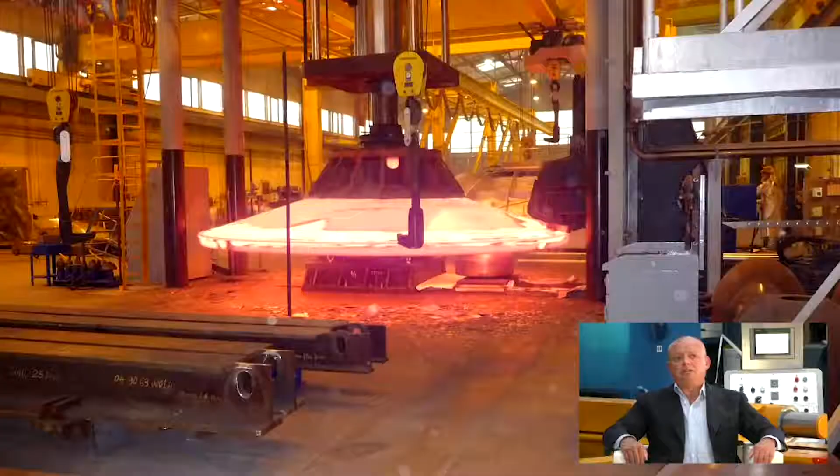I think that there is always room for innovation and sustainability. Faccin Group embodies this spirit by offering to the market 3 leading brands like Faccin, Boldrini, and Roundo. Our challenge today is to achieve the highest level of efficiency in any kind of machinery that we produce.

Well, I can definitely say that we are in very good hands. But before we move to the main subject of this webinar, Rino, I wanted to ask you something. We have seen a huge interest in this webinar and many registered people from all over the world. Why do you think this is?

Well, Javier, let me start by saying that most manufacturers of pressure vessels, truck tanks, silos, and other kinds of tanks and pressure vessels purchase the dish heads and then they weld the component to their rolled part. Let me tell you that the demand is huge and dish head manufacturers are getting overwhelmed. With the pandemic, the deliveries, particularly internationally, has been disrupted. And there is now a new line of thinking about manufacturing locally, and I do believe this is driving our interest to this webinar.

Perfect. So we will focus on this concept and more during our webinar and explain in detail what we are doing to achieve efficiency in our machines. In the meantime, let me show to our viewers our group's manufacturing capabilities. Certainly, Javier. Let's start from the real facts of our capabilities and our facilities.

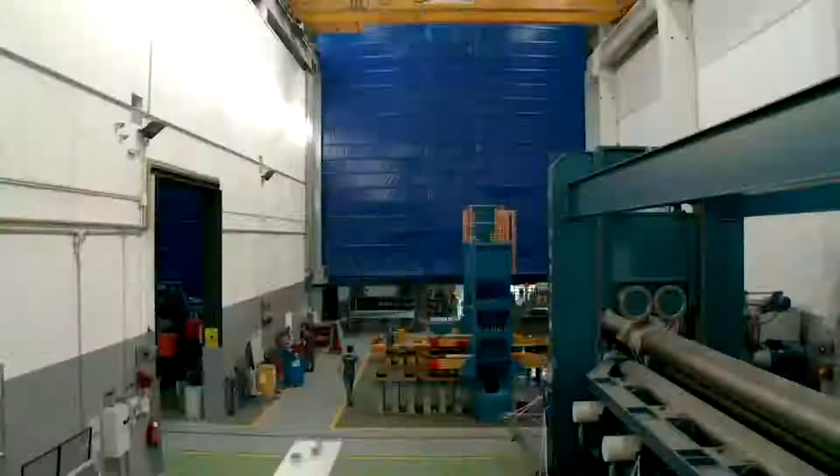Wow. During these days, we have been discussing all over the world about the impact of COVID-19 on the world economies and on the industrial production after the restrictions applied to contain the pandemic.

So, Rino, what do you think about the vertical production structure? Javier, this is a real big thing. During the last decades, many industries have organized their supplies by outsourcing from the market. It has been understood very clearly now, when the market collapsed and many companies could not follow their production schedules and supply chains were not performing, that outsourcing can be risky in such a market condition.

As you have seen in the company video, at Faccin we have a vertical integration. We start with plate profiling, fabricating, machining, and we can do internally turning, milling, boring, and polishing.

We found out that having this in-house has been the greatest support for our resilience. Furthermore, we have full control of quality inspection, pre-shipment commissioning, testing, and crating for shipment. It was a wise decision to keep vital and critical production stages inside Faccin. This allowed us to keep working and acquire new orders, as we have better control on delivery and scheduling.

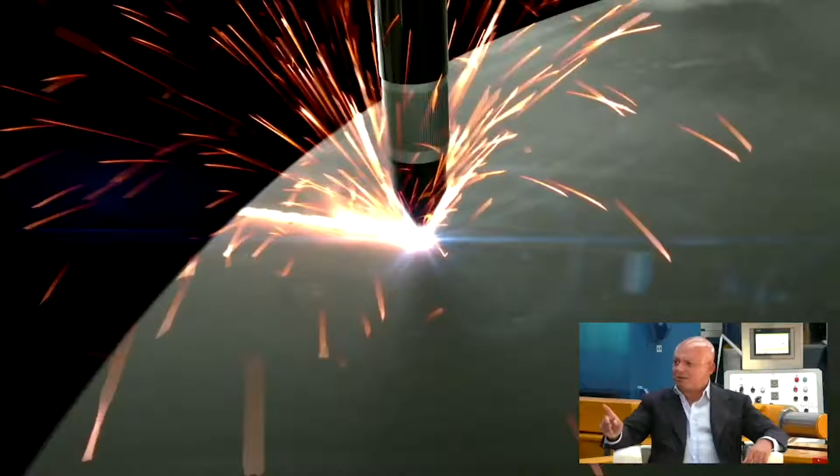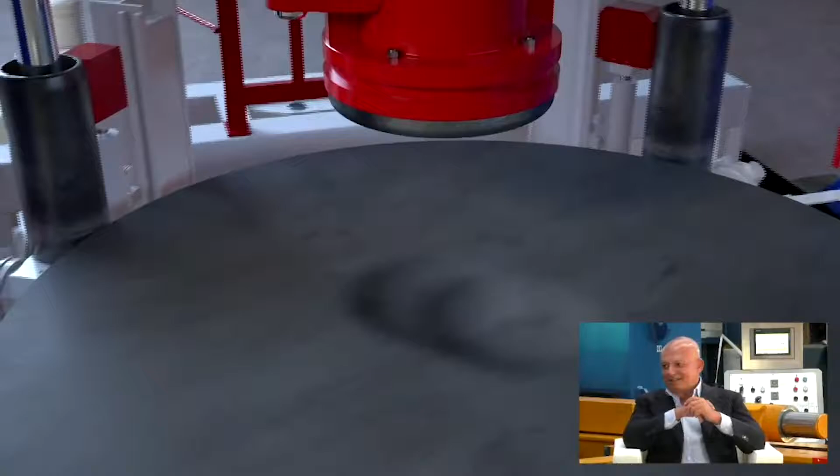Rino, we are now ready for the first main question. If I were a client, what should I know before investing in a new dish head line? At first, Javier, there is not a common rule. What is best for one client is not the best for all clients.

Rino, I think we both agree on your assessment. Tell us how to get the best solution for a specific customer. As a first step, it is very important to make the preliminary approach to the customer's needs. The pre-feasibility is the most important stage for the proper definition of the correct machine.

Let's ask Andrea Comparin, Senior Sales Manager of Faccin Commercial Department. Hi Andrea, can you introduce yourself and explain what is generally the client's preliminary approach? Hi, this is Andrea Comparin. I've been working at Faccin since 2011, and I've had the opportunity of traveling throughout the world for the company, but I follow mostly Northern Europe and some Mediterranean countries. I also joined the sales team for relevant projects all over the world, from Australia to South Africa, Middle East and Far East.

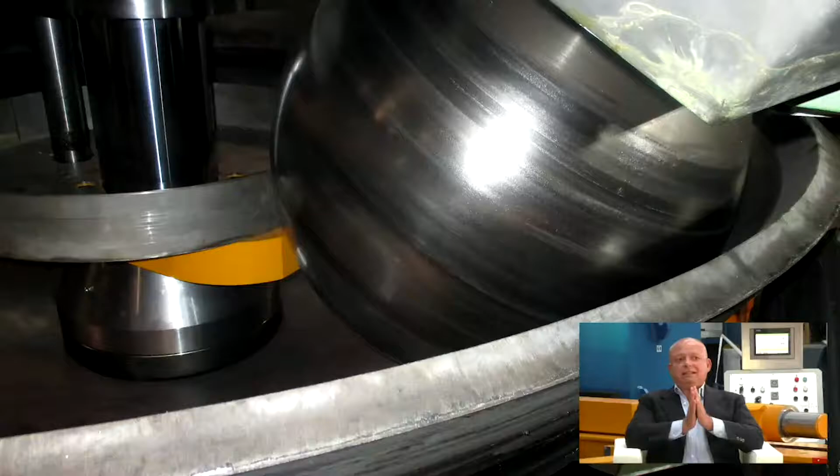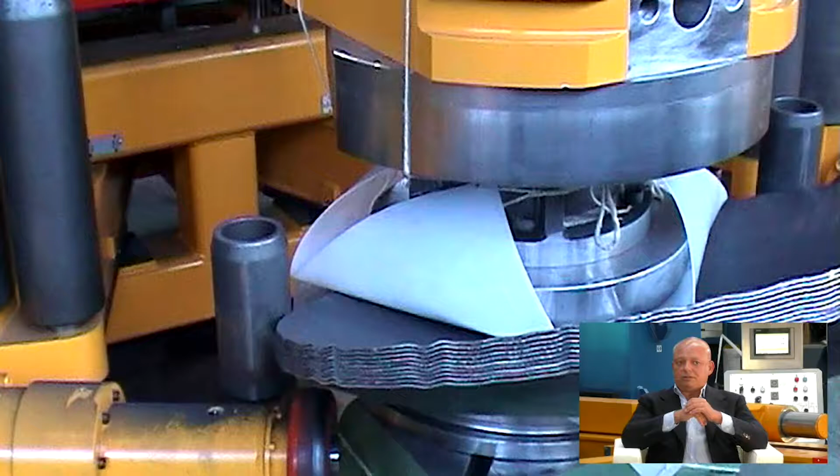Javier, you're asking something very important. Many times we see proposals from our clients, and at first sight they just look like a list of brands and components used to manufacture the machine. We are a machine manufacturer, and we care about components, but our target is not reselling pumps, bearings, valves, or electric motors. What we have to sell is the performance, and we have to guarantee the performance of our machinery. Our machine has to be a profit-making unit for our clients. Again, a profit-making unit.

Rino, let's make it simple for our viewers. How do we get to a sustainable investment for our customer?

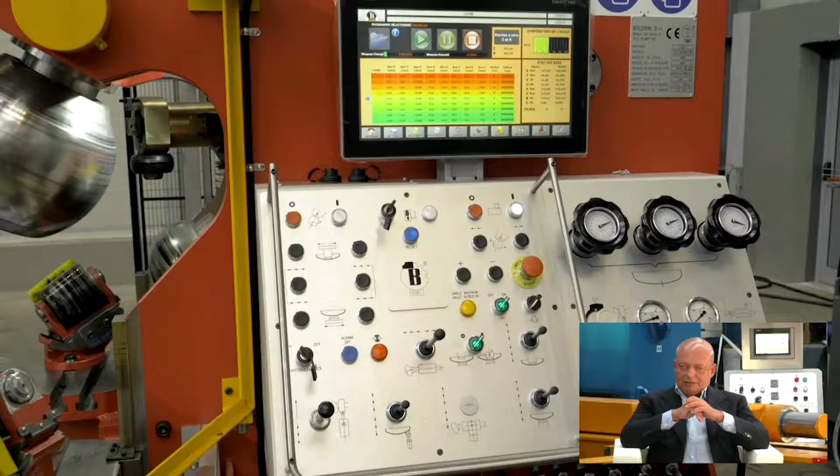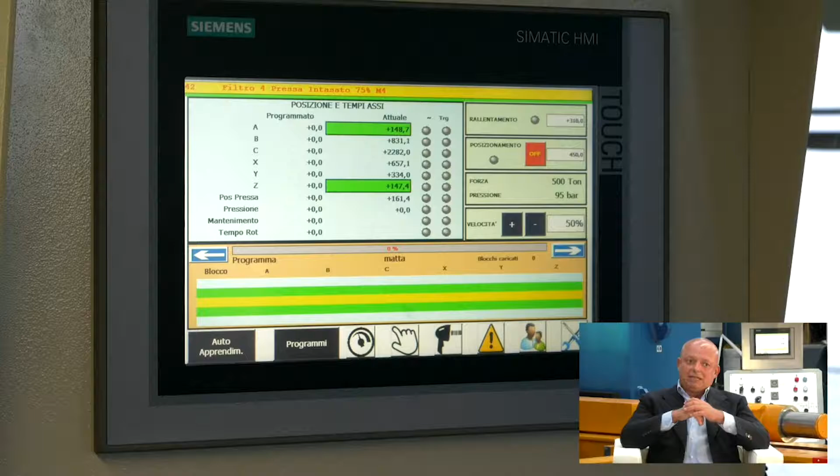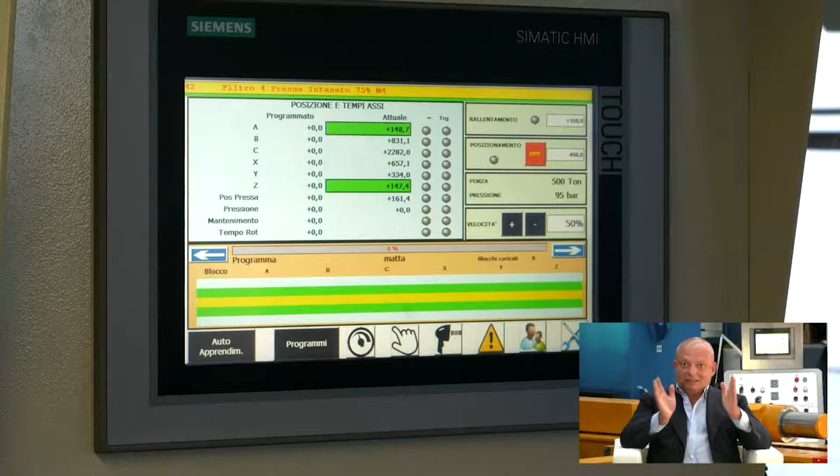We start from the performances of the machine and the production output. We are investing in new software to increase the data output of the machine so that our clients will have the machine linked to their network, with the possibility of checking from the back office how many hours the machine was active, how many hours it was running in production, and the total daily production. In some cases, it will be possible to upload production cycles directly from the office to the machine, and also our target is to check the final production cost of dishing and flanging, including the energy cost applied for each stage.

And also, we have to be predictive for the maintenance of the machine. It will be a modern and updated way to comply and to have a better footprint in the production plant of our clients, and to reduce carbon emissions and protect the environment.

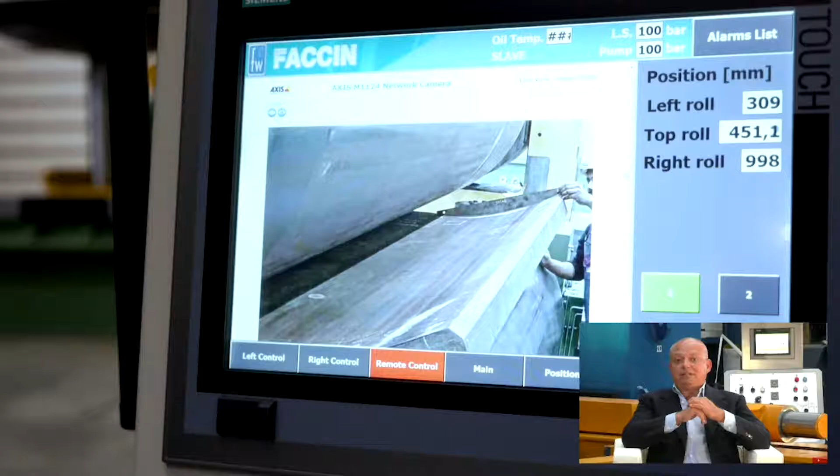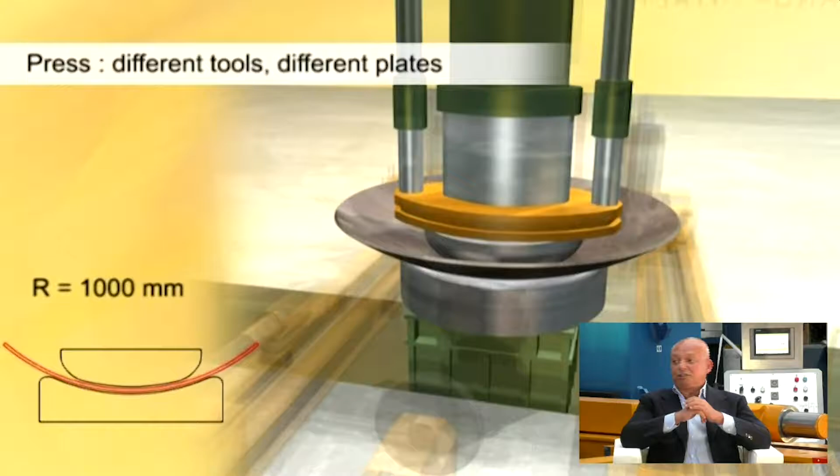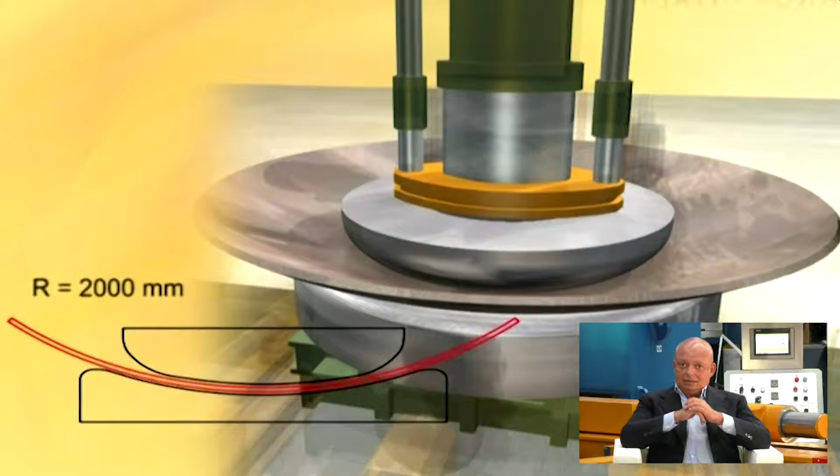It sounds very interesting, Rino. Could you explain what else we could offer to our customers? Javier, we are very flexible to adapt to our clients' needs, and for many decades we have manufactured many different types of press dies for specific needs. The right press tooling might reduce the production time up to 30-40% in the total dishing time, and it can also reduce the thinning.

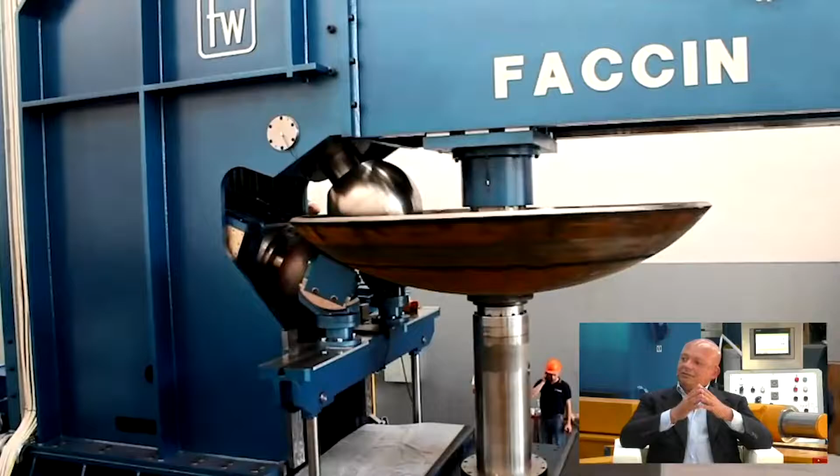A typical example is when we press aluminum plate. Some diameters and radii require changing 3 to 4 dies, and the time to change the dies is much less than the total time if we were not doing this process. So at the end, we save time.

Using the right tools, we also reduce significantly the thinning. Why that? Because we don't overwork the material. Saving the material is the first target for a client. And also we may save intermediate heating processes, because if you can control the thinning, we don't need to add extra expensive heat treatment. I think Marco Massensini could tell us more about his experience.

So Marco, can you tell us about yourself and your experience in the support process to your clients? Hi Javier, I'm very dedicated to the support of our clients, and I recently had a few cases that we studied and carried out successfully. I joined the Faccin family 4 years ago, and I come with a process engineering degree. I've had a great chance to grow my capabilities following very interesting tasks.

One client with a market activity of 25 years producing equipment for the pharmaceutical industry and food and beverage had developed its own equipment. I analyzed their production steps with them, and finally we came out with new machinery and new processes. The final result was a significant production cost reduction, and our client was very satisfied since they obtained a higher added value product to offer in the market at a better price.

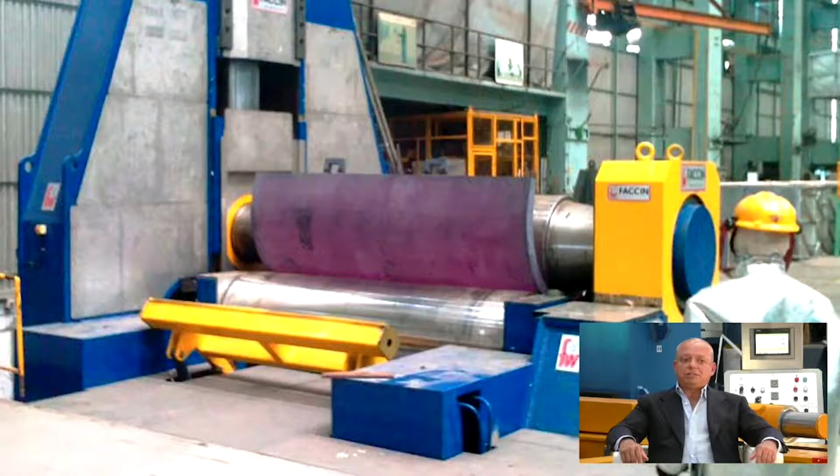We have materials that can be formed in both cold and hot condition, and we choose hot forming many times to increase the forming capability for higher thicknesses. In pressing, we may also choose the hot process to reduce thinning and cut manufacturing time. We have very successful experience with the dishing press and manipulator to press plates up to 160 millimeters in hot condition. In other cases, heat is necessary to avoid damage to the material, for example aluminum, where we have to heat the plate up to 250-270 degrees to avoid cracks. With titanium, if you don't heat it up to 500 C, there's no chance to form it without dramatically damaging the material.

Hi, this is Diego Morbini. I've been working at Faccin since 2005, and I've visited many countries during my time at the company. But I now follow mostly the Chinese market, Far East, and Oceanian countries. I also support the sales team in relevant projects, from technical evaluation of special equipment to tailor-made solutions for different fields of application. It's very important to start with a proper definition of our clients' needs, as this is key to the right proposal. I've got experience selling forming lines to customers that manufacture pressure vessels and cryogenic tanks. In Vietnam, for example, we were successful twice with a client that produces heads for the global market.

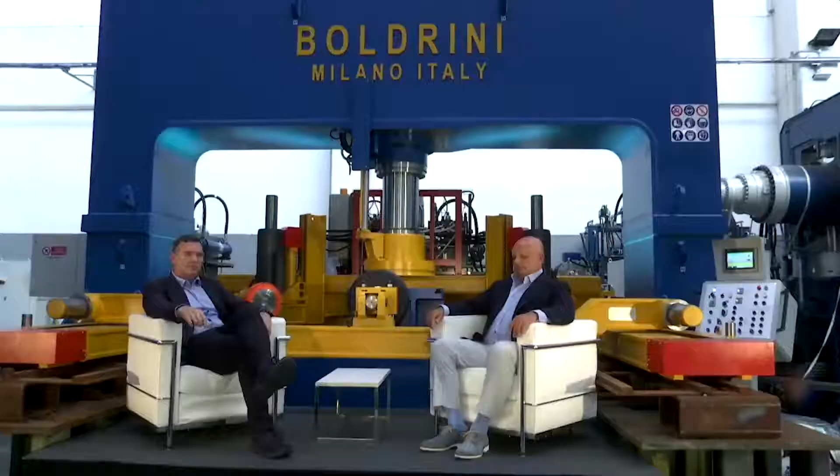So Diego, in your opinion, what is the key factor of your marketing strategy? I think our clients consider the support we offer, from the proposal to after sales. We build confidence based on the group's long experience in design and manufacture of head forming lines, and all the expertise we can provide by adding other machinery to the production line.

So in other words, Diego, you're saying that integration of a variety of machinery for different production processes is a very positive matter. Yes, of course. We are prepared to transfer the necessary technical information to support the client's final decision. If required, we may also offer a complete manufacturing line for tank or pressure vessel production, including support for defining the complete production cycle.

Rino, there are so many different models of presses, manipulators, and flanging machines. Why? Some machines look very similar, but the production process we can achieve has significantly different results. The easiest way to understand is to check the geometrical capacity of a machine. But then we can see that specific configurations could save time, and time is money.

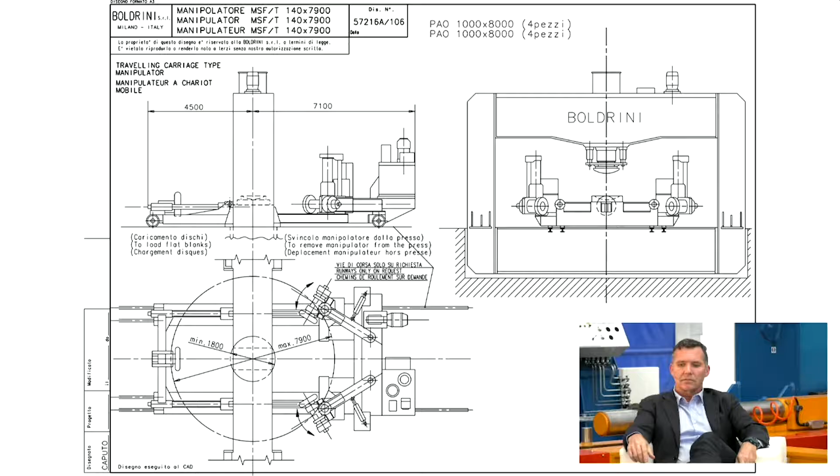Rino, I would like to show some pictures. Would you like to comment? Surely, please. Well, you can see in this picture a layout drawing of a typical dishing press with manipulator. And this is specifically a machine with a pretty big daylight of 8 meters and 1,000-ton force.

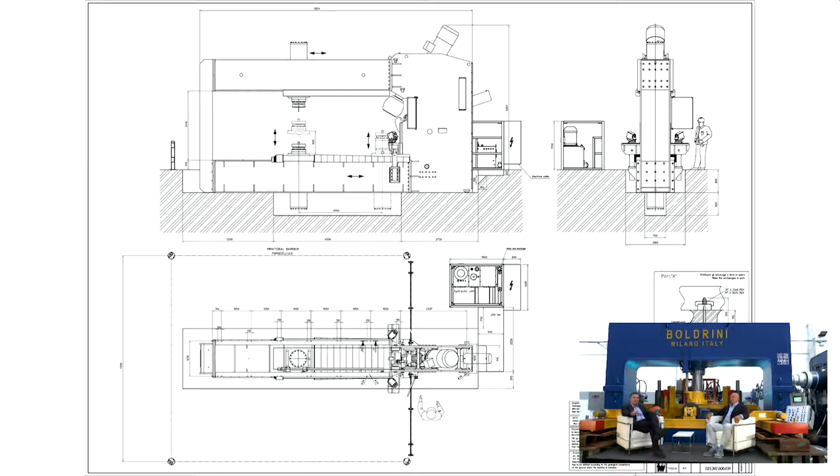In this other picture, we can see a flanging machine designed to make heads without a center hole, very suitable for high alloyed material and stainless steel. And this is another different configuration of flanging machine, an open frame machine with center hole. This is designed for heavy duty and heavy wall plates up to 50 millimeters.

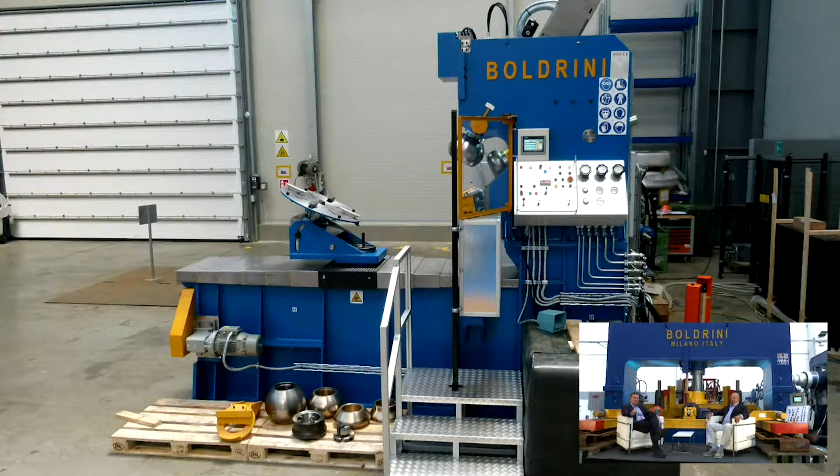And this small flanging machine is small but powerful because it has interesting features. It can work without the upper beam. It is very fast and very versatile, especially for making conical shapes, tilted and with vertical axis of the cone.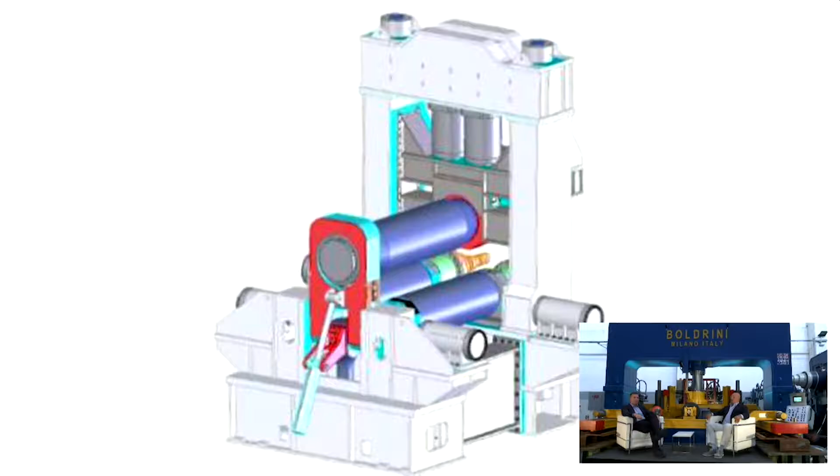So one relevant application is the construction of truck tanks. We have received many inquiries about different shapes of these heads. Could you please explain our system? Well, Javier, there are different methods to build truck tanks. Let me start with the oval and elliptical section type.

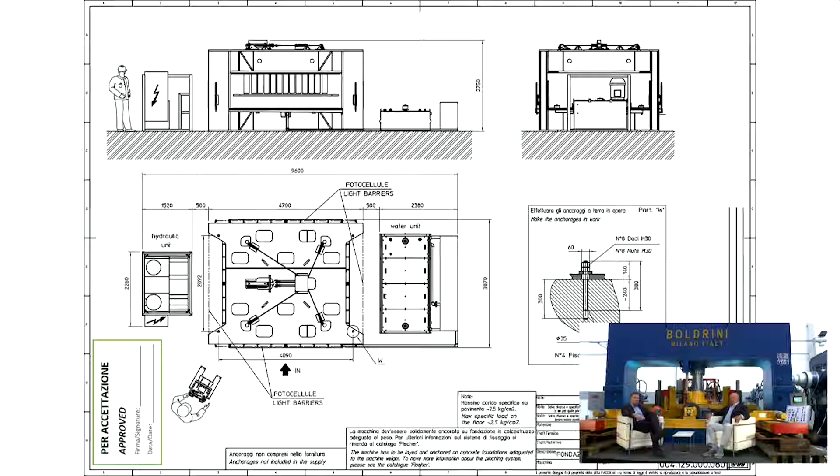You can see in this picture the layout of a very special press. It's a hydroforming press designed to make oval, elliptical, and multi-center heads. You can see in the next slide the specific part produced. Being formed with hydroforming, the stresses are very even, and there is no part of the material that is overworked, with no damage on the surface. It's also a very fast process.

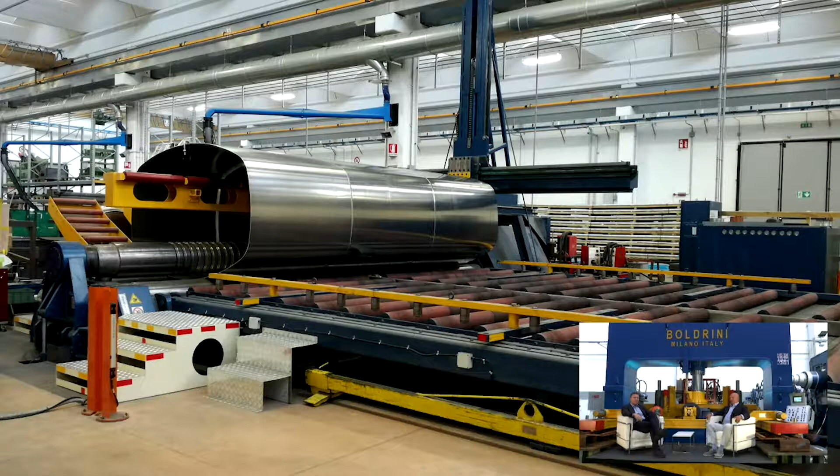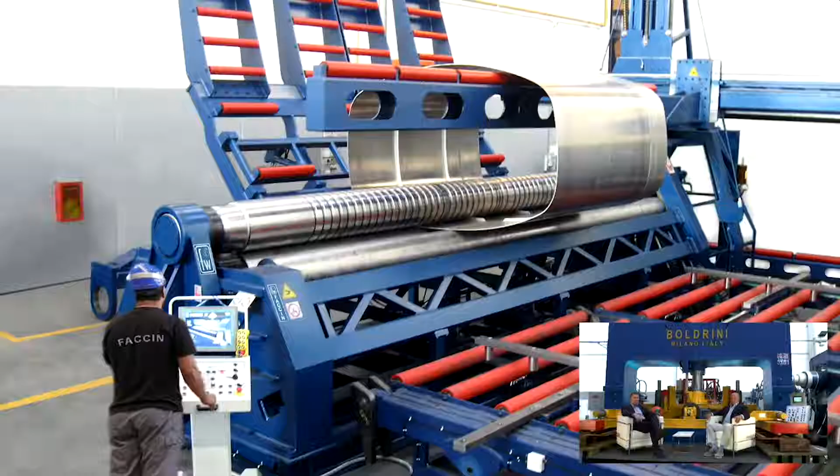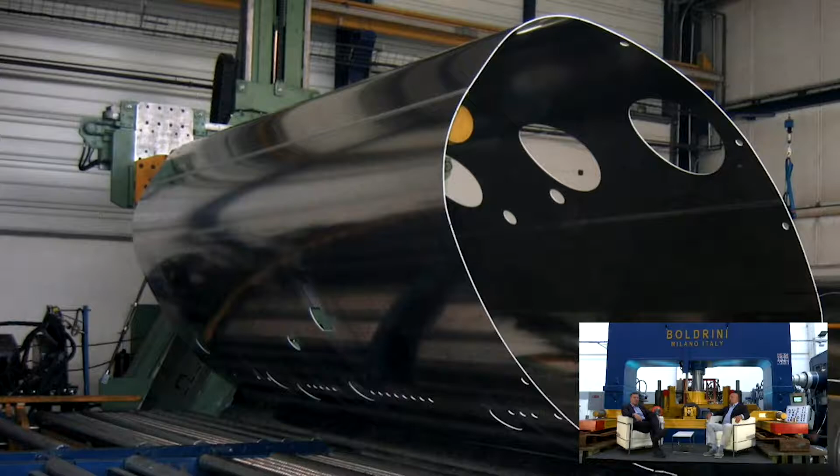We also have the capability of doing CNC plate roll, 4-roll type, especially designed to make the shell part of the truck tank. In this case, the top roll is designed with special grooves that are necessary when we roll shells already welded with inside stiffeners. Or we can even make elliptical shaped shells when the machine rolls plates that are already pre-machined with holes and pierced.

We have so many different configurations and models, as we might see in the following pictures. What is the technical reason of such design variety? Javier, for any different design there is a reason: saving production time first of all, and optimizing the process line. Let me explain going to the pictures.

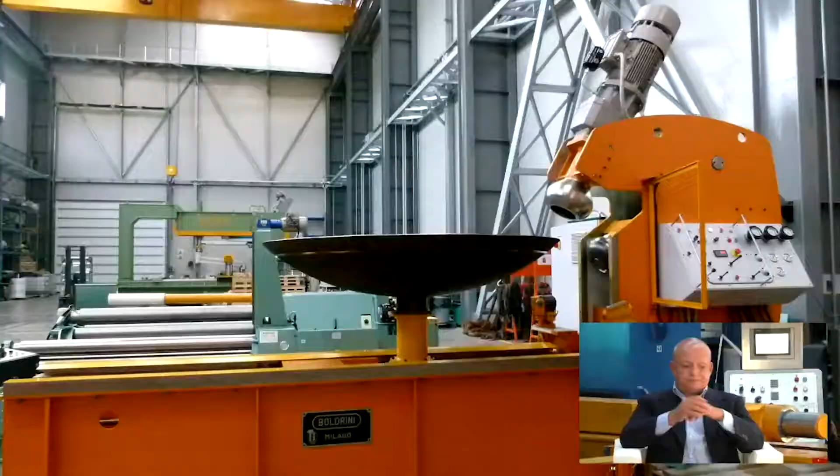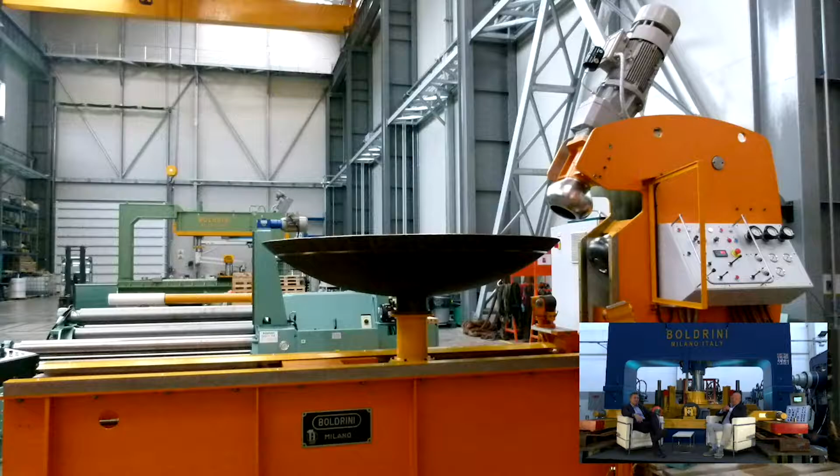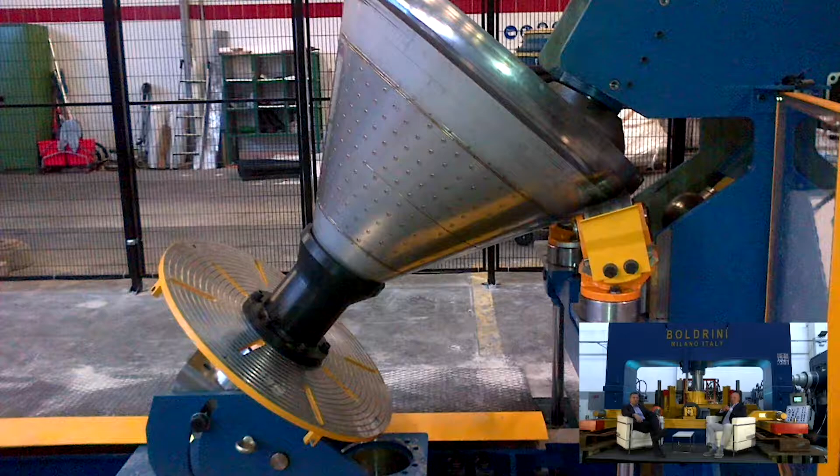This machine is the smallest we have in the range, a 6 millimeter up to 4 meter diameter flanging machine, electric drive, very effective machine, special for simple tank manufacturers. We have a similar machine with a device studied to flange a conical shape, tilted, for the food industry, for example.

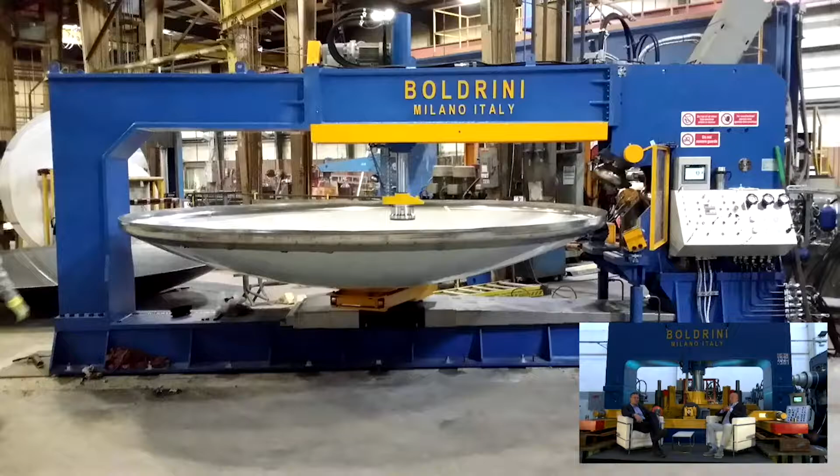This other machine is a combination of a machine without center hole and with center hole. One part of the machine can be disassembled to reach higher diameters, or it can work without center hole, and it is very effective when we work on stainless steel blanks.

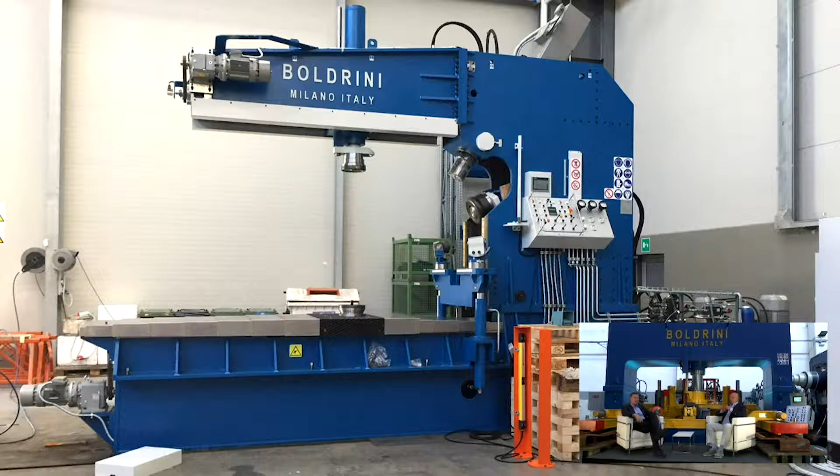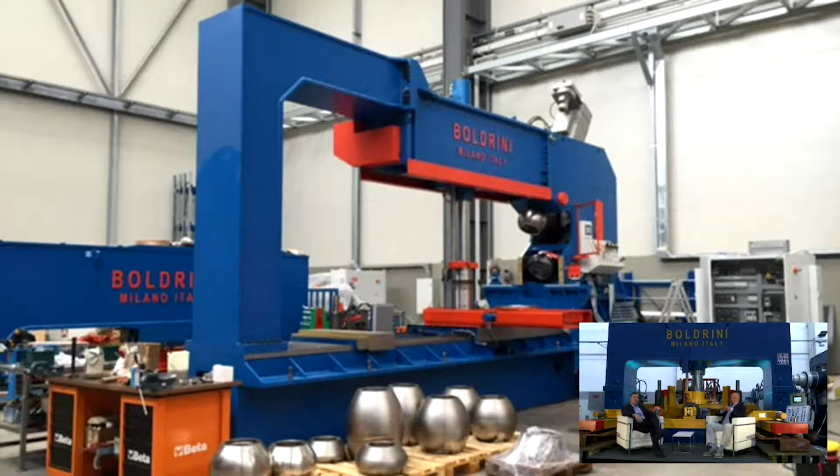This is a typical configuration of a machine with center hole, with electric drive and the most modern control for the hydraulics. This is a similar machine for higher capacity. It can also be supplied in the configuration with and without center hole by removing one portion of the upper beam.

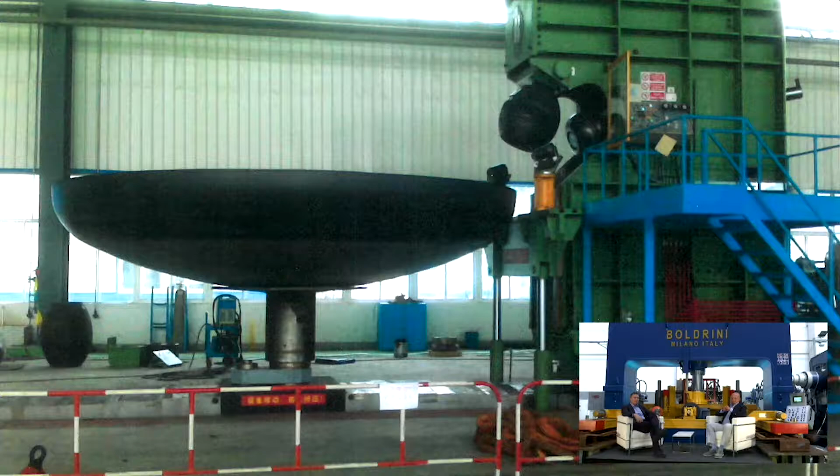And this is a unique piece of equipment, a flanging machine in a configuration that can flange components up to 12 meter diameter. 12 meter diameter is 40 feet - a very big diameter - with a plate thickness of 35 millimeter. It has a very special clamping system that does not require any man operation in the lower carriage.

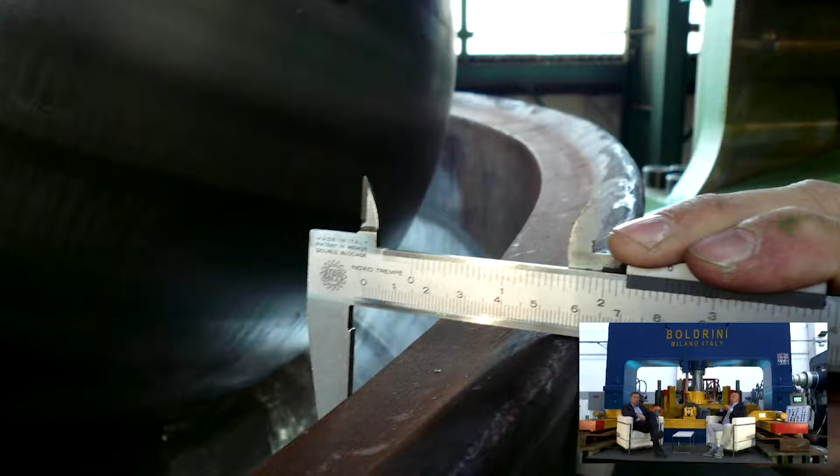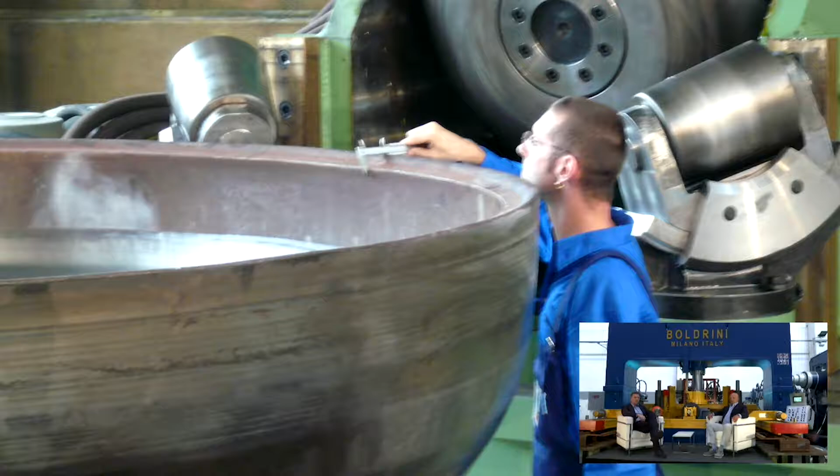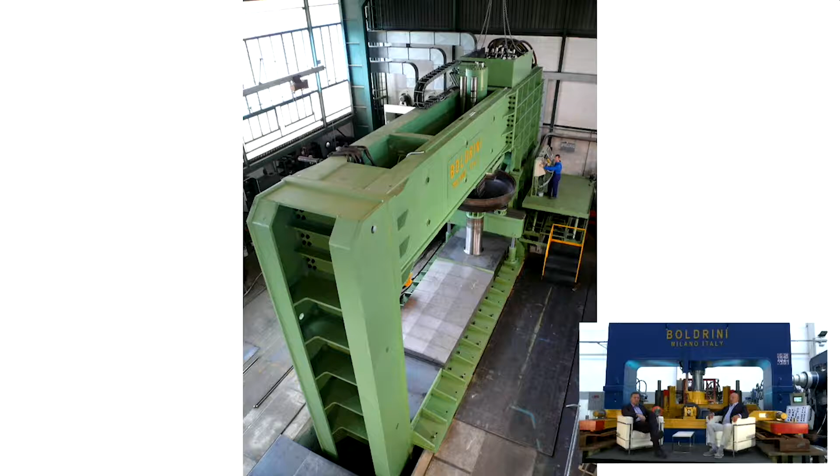We can also have the widest variety of capability working on plate thicknesses. In this specific case, we have a head done with a thickness of 65 millimeter, made with a special machine that can make components up to 80 millimeter in cold forming. You can see very well in this picture how massive the wall of the head is compared to the hand of the operator. And here you can see how massive the machine is - today it's still the highest capacity machine in the market, 340 metric tons, with an incredible capability of making heads without center hole.

So what about the technical reason of different press designs and applications for the automatic manipulators? Javier, we can press parts from 250 millimeter diameter up to 10 meter diameter, and in some cases we can also look at specific client demands. We can also recalibrate finished heads, or even make very long segments for larger spherical filled tanks. Any custom design can be done by our technical department, and we have presses that can cover the whole requirement of the industry of tanks and pressure vessels.

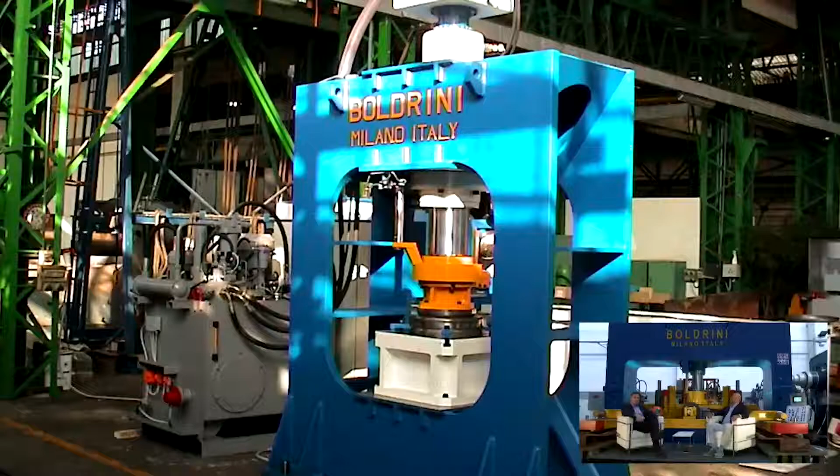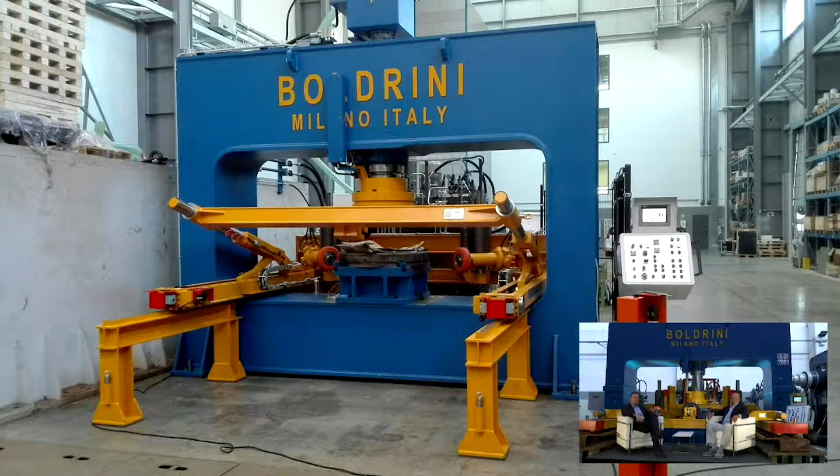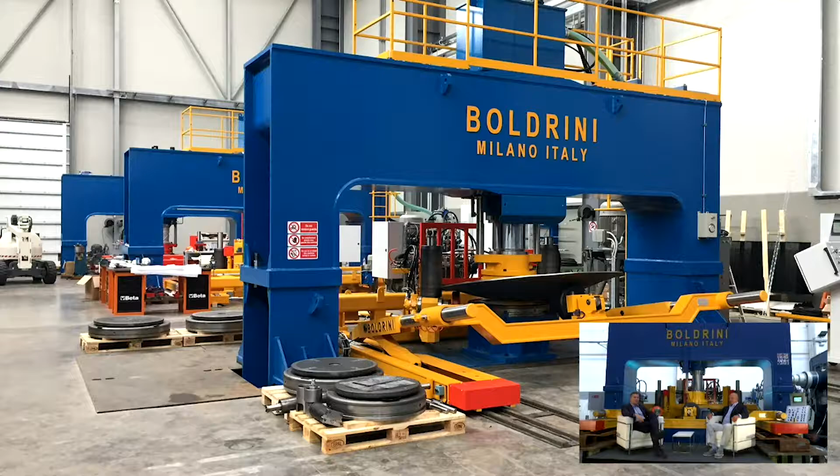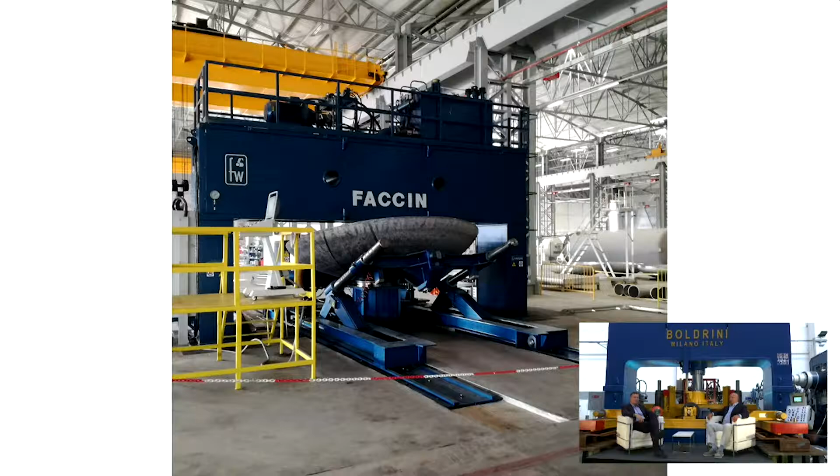With this tiny 150 ton press, it's a very fast equipment, very suitable for small components. This is a 200-ton press with CNC control, with a manipulator designed also to make parts of small diameter. This is a 300-ton press, typical for a tank producer and also for trailer tank producer. This is a 600-ton press for heavy-walled material with automatic manipulator.

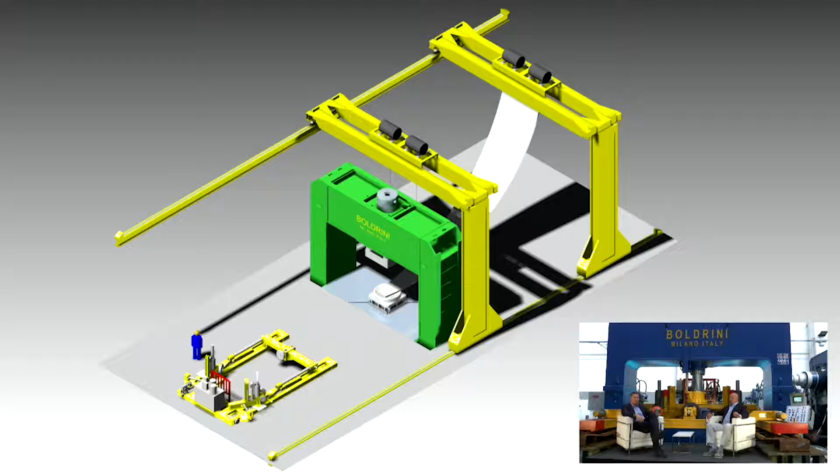In this layout, you can see the combination of the crane and the press to press long segments to make spherical fill tanks, and a manipulator to make the crown. And this is the typical design of the automatic manipulator that fits in our presses and in many other presses.

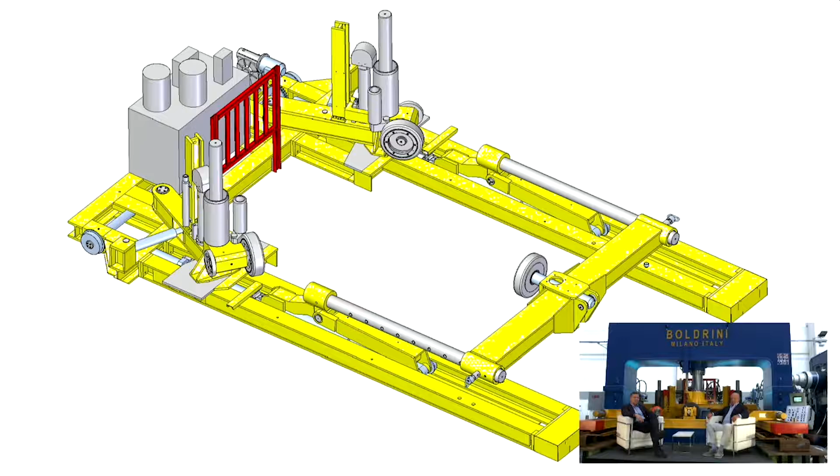When we are talking about very big diameters of hemispherical heads, or very big diameters of elliptical heads, we have the possibility of doing that with the technology of crown and petals welded together. In this case, we can design the complete process so that with the press we can make the segments and we can make the crown.

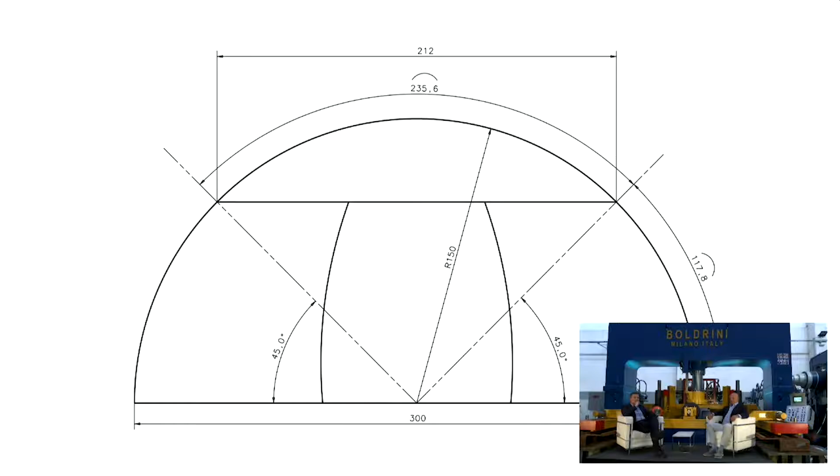We also have presses, a C-frame type, that are very suitable for recalibrating heads and very suitable also for recalibrating hemispherical components.

So, Rino, what is the most difficult task in manufacturing machinery capable of warm and hot working? Javier, we have to consider three different aspects. First, the design of the machine—we need to protect the parts of the machine from excessive irradiation. Second, and very important, we have to protect the worker and the complete process line around the machine. Third, we need very accurate controls of the machine to avoid thinning and damage to the material.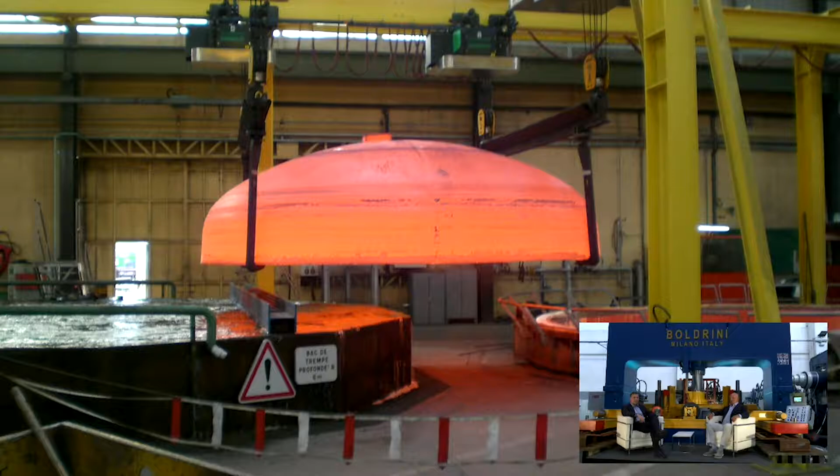We have done the widest span of application for warm and hot forming in the head and tank industry. You can see in this picture a very thick wall component for the nuclear industry.

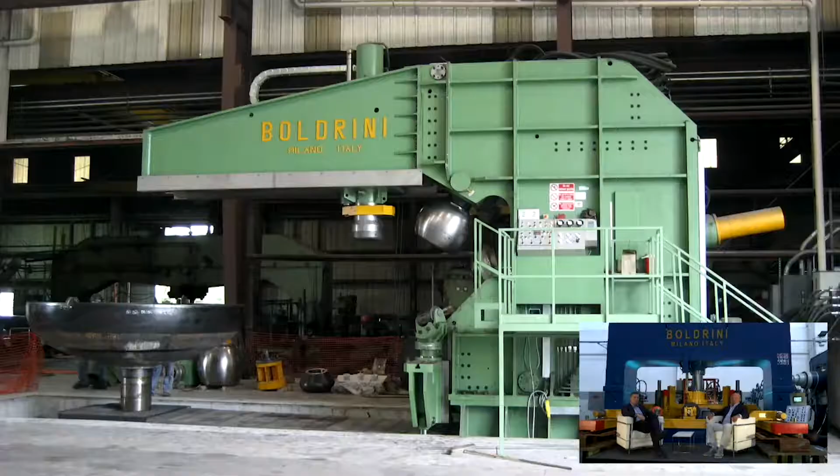This is a larger size, also with hot protection, to make heads up to 50mm thickness.

So, Rino, I understand that hot working is very important in many applications. Could you explain more about this subject? Certainly, Javier. Let me comment on the following picture explaining the advantages and the peculiarity of the hot forming process.

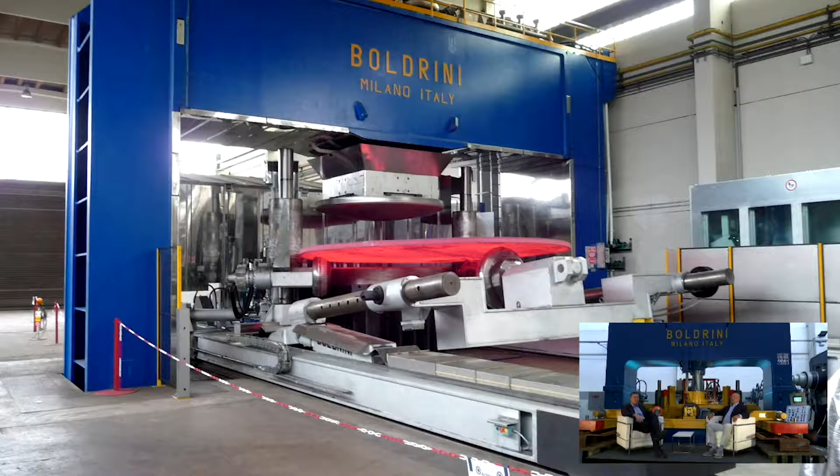This is a special configuration of dishing press designed to work hot blanks exactly like working with cold blanks. So we designed it with all the protection and better kinds of control, and this press can also use larger dies in order to reduce the process time.

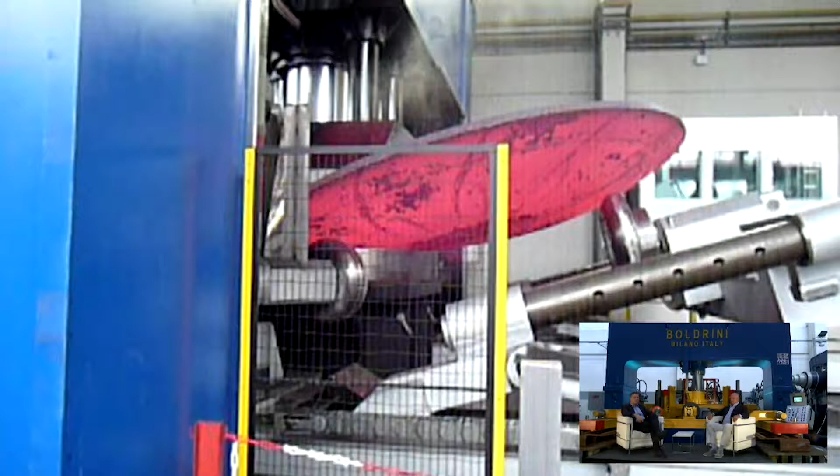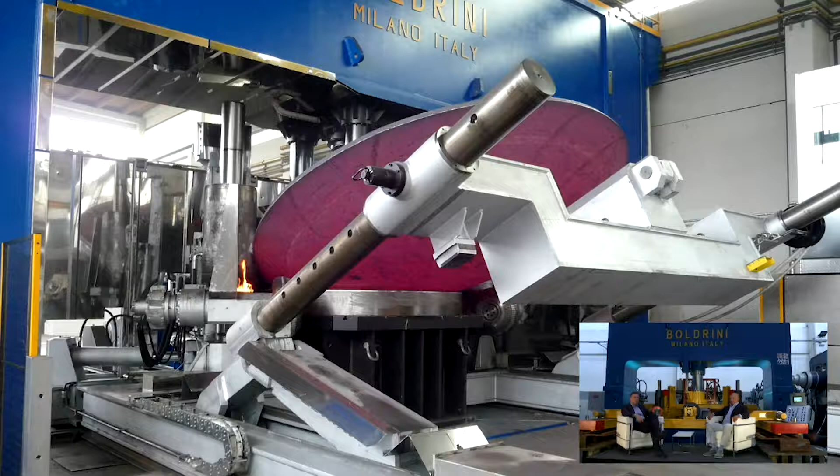You can see one phase of the process, and the piece is still very hot, but we already reach a good shape. Now you can see the piece cooling down, and the shape is practically finished. And here we are at the last steps of the process.

So, the return on investment and the performance of head forming machines—Rino, how would you approach this subject? Javier, the range of the Boldrini Faccin machines is actually the widest in the market. We are able to guarantee a solution for any material: any kind of carbon or alloyed steel, any kind of stainless steel, and the duplex family. But we can also work on titanium, copper, aluminum, and clad plate.

So the life cycle of an investment is also linked to the productivity and the scheduled service of the machinery. Massimo, can you tell us about the new improvements in your department? Hi Javier, service is a very sensitive area as we are responsible for the machinery—from testing before shipment, up to units already installed for decades. We have a file for thousands of machines, and we don't stop; we are constantly making improvements, including a WhatsApp quick contact center for instant communication, in addition to technical improvements for remote communication with existing and new machines.

This is a cloud-based service connected through a smart box installed in the machine cabinet. This smart box is also designed to upgrade equipment and to monitor some functions.